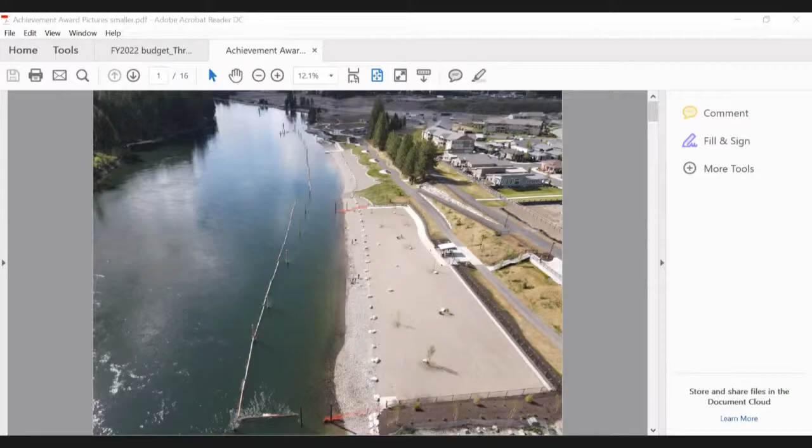I want to thank you for all the work that's going on. There'll be more information on this tonight. You were recognized in the state of Idaho. It's tough competition. The city actually received two awards this year, which doesn't happen very often, because there are 200 cities across this great state, and there's only about 15 awards given out. So it is a high-ranking award, and we couldn't be more pleased to receive it.

In appreciation, we'll let you have it for a while so you can display it on the wall, Mr. Burns, and shine it up for us, and then we'll share it back and forth. So all the work that you do is greatly appreciated. What a great public space we have, thanks to you, and you've been recognized by the state and our other sister cities. So that was my public comment to you.

So your Parks and Recreation Department put together the application. It was looked at by a group of individuals, and you're a winner. So I'll give it to Tony to put on his wall. Thank you, Troy. Thank you for that submittal. Maybe we could take a picture of it and put it on the website next to the Atlas District. Yeah, that's a good idea.

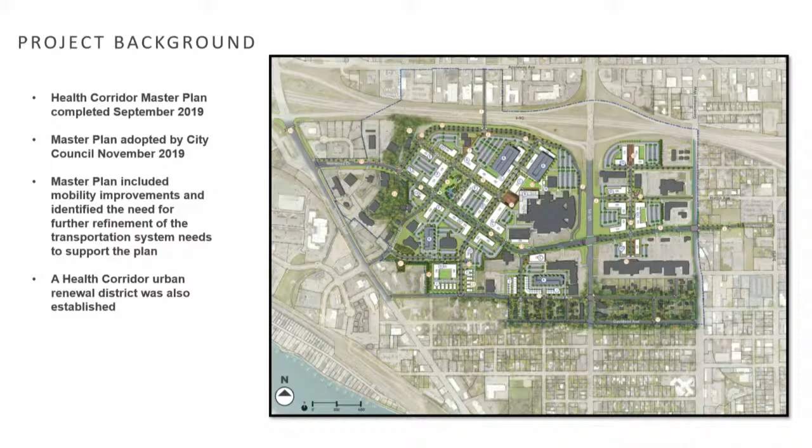So again, project background: the Health Corridor Master Plan was completed in September of 2019, and was adopted by Coeur d'Alene City Council in November 2019. It had some proposed mobility improvements in the plan, but it needed further refinement and traffic analysis, and that's what this project was intended to do.

So the goal of this project was to review the existing needs of the health corridor, as well as look at future transportation needs to accommodate the future development anticipated, both in the background as time goes on, but also by the master plan itself. And then develop an implementation plan for those future transportation needs once we had identified them.

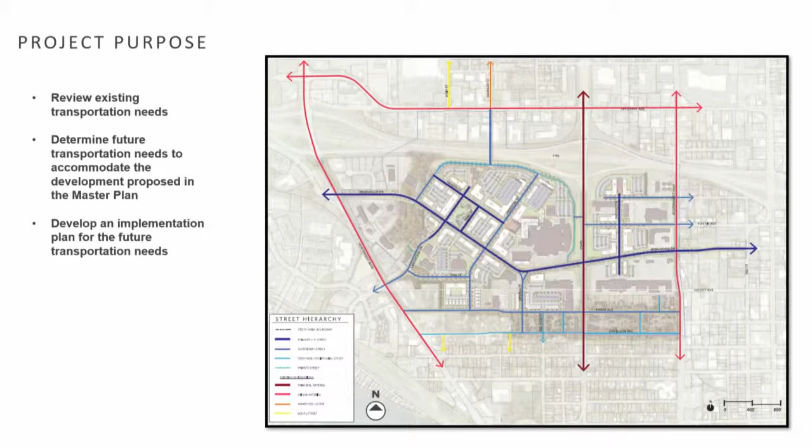That's the project study area.

As we talked about last time in June, COVID-19 really impacted the ability to collect new traffic counts. So we relied mostly on previous traffic counting efforts that have been done before, and then used some of the big data sources out there which track cell phone and mobile app type data, as well as Bluetooth data from the GPS in your cars, to fill in the gaps in the data picture that we had.

We then looked at short-term solutions based on the existing conditions. That included signal timing updates along Northwest Boulevard and US 95, and we also identified some need for access management along Appleway due to the collision rates being higher than the statewide average.

From the big data analysis, we were able to look at origins and destinations for the health corridor. As we mentioned last time, predominantly traffic is coming to and from the health corridor from the west, either through I-90 or Seltice Way, and it's coming from the north predominantly through Ramsey Road or US 95. The locations where those people are going within the health corridor or leaving from, as you can expect, it's the Kootenai Health Campus as well as the Interlake facility.

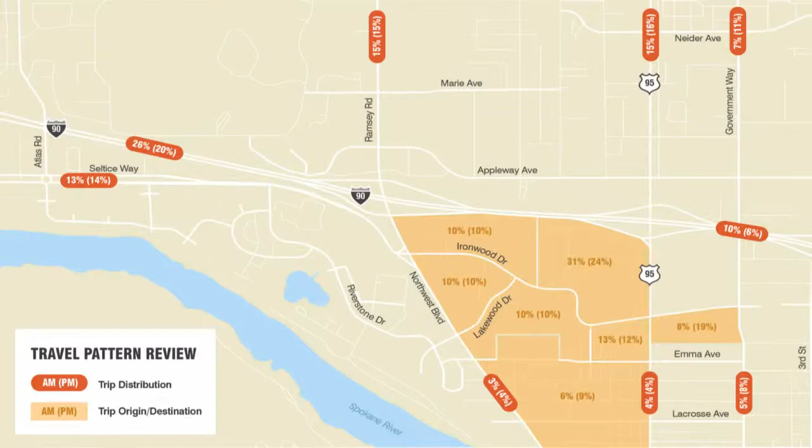So we went into our future conditions analysis, and some of the key takeaways from that analysis are that additional capacity improvements beyond those already in a lot of the master plans out there will be needed in the next 20 years to bring the health corridor to a passing grade.

The health corridor master plan improvements addressed the concerns in the immediate vicinity of the health corridor, but did not address the congestion created just by background growth along the major corridors.

Some of the major improvements we analyzed as part of scenario 1, 2, and 3, such as the Julia Street overpass and frontage roads from Northwest Boulevard to that Julia Street overpass, as well as an interchange upgrade at Northwest Boulevard, significantly reduced the congestion within the health corridor.

As a brief reminder, the no-build condition was the first one we looked at, and this is just the existing development pattern as documented in KMPO's future forecast.

We also incorporated some of the known projects being developed, including the I-90 third lane widening, currently under analysis by ITD, as well as the US 95 interchange upgrade, which is already in some of the future plans. In conjunction with upgrading that interchange, there will also be some widening necessary on US 95 from Neider to Ironwood. We also have the Atlas Mill development, and the Lacrosse connector with traffic signals currently under construction by the city of Coeur d'Alene.

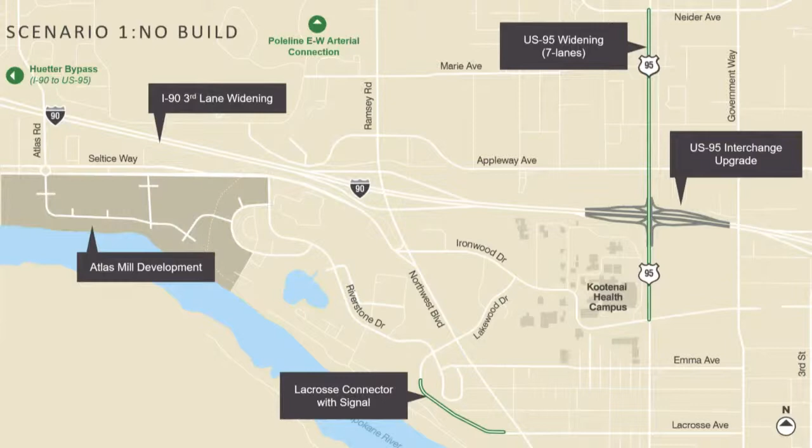That led to looking at the elements the master plan introduced, including a local access road north of Ironwood that helps parcels circulate without needing to go onto Ironwood Drive. It included a Howard Street overpass, a new signal at the Ironwood Drive and Lakewood Drive intersection, and a local access road on the southern blocks to help with circulation for those parcels as well, again to alleviate pressure on Ironwood Drive being the main conduit.

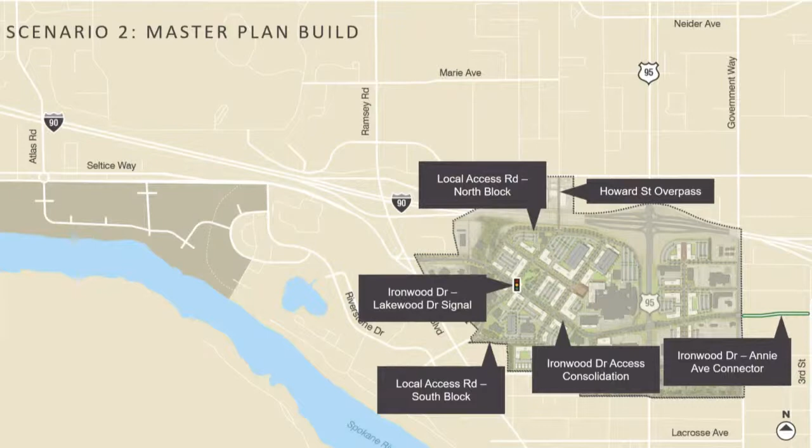It even includes a crossover from Julia to Howard to the north, so that people can have a new north-south connection from the Riverstone development all the way north, eventually leading to Kathleen.

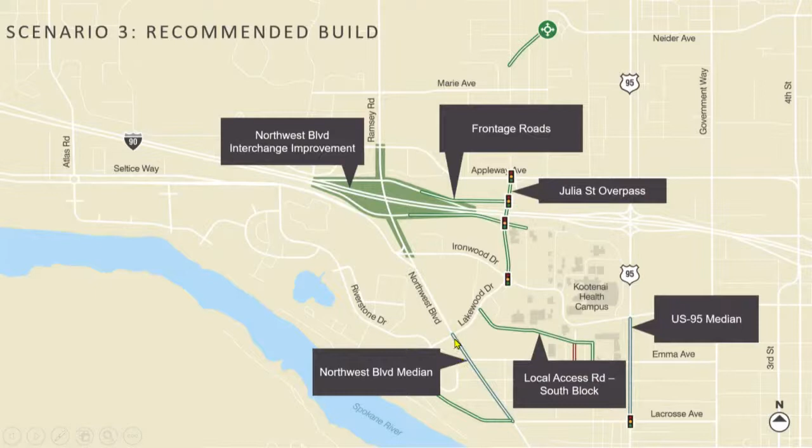We also looked at congestion in all three scenarios, and we consistently saw overall congestion, or people waiting in line to be served by the signal, reduced at all the signals within the corridor.

So the next task, and what's new in this presentation, is going over the implementation plan. Our goal was to take the projects we looked at in the future conditions analysis and phase those into a plan. These phases line up with what was approved in the Health Corridor Master Plan, so we're all talking in the same context of years and timeframe.

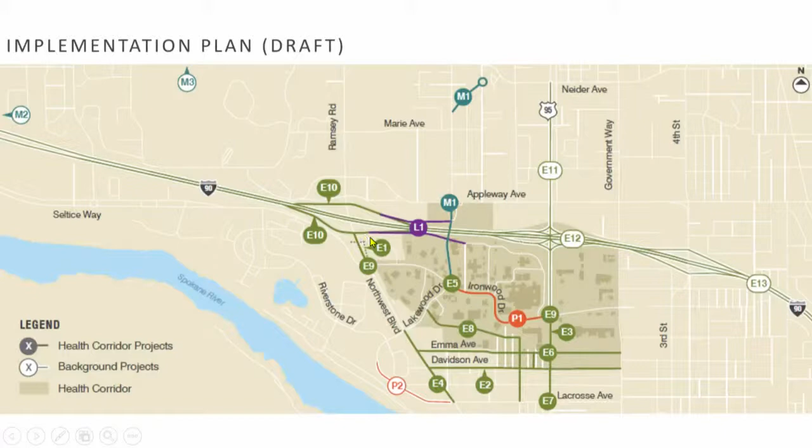The preliminary projects are in orange. We have the Ironwood Drive access consolidation taking place as soon as parcels start to redevelop, and project number 2, the La Crosse connector, that's going in right now. Then we have a lot of projects in the early phase, between 3 to 7 years out. A couple additional projects are in the midterm: the Hutter Corridor to the west, the pole line connector to the north, and the Julia Street overpass with extensions. Then we have the frontage roads in the late phase, beyond the 15-year horizon.

When we break those out and look at the cost estimates, the Ironwood Drive access consolidation we're assuming happens in conjunction with redevelopment, making sure developers are aware that those costs carry forward. Then we have the Northwest Boulevard interchange capacity improvements, mostly widening of the existing ramps, hence the $8.9 million cost. The US 95 widening and Ironwood Drive capacity improvements we're assuming happen in tandem with the US 95 interchange upgrade, which when we priced out the current plans is about $86.6 million. The Julia Street overpass comes in at about $16.9 million, with the frontage roads in the late phase at about $6 million.

I know that's a lot of dollar numbers thrown at you. Do you guys have any questions about the phasing or comments on the implementation plan?

What's the funding on the 95 upgrade, there's 86 million? How much of that is state, or do we know yet? So we're not identifying the source of the funding right now. We're identifying, you know, we've got to look at that as part of this.

Okay, thank you. Dan, did you have something? No. Anybody else? Any questions for Dowell? Not for me. Well, thank you for the update. Yeah, absolutely. Thanks.

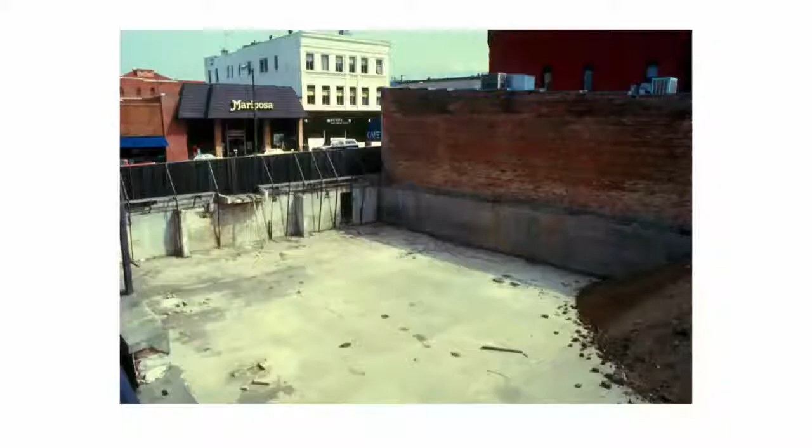And Brad, the Sherman project came next, and the Lakeside, and on and on. We did fill the hole up. The National Guard took some excess soil from the fairgrounds, and we had a parade of trucks bringing this forward.

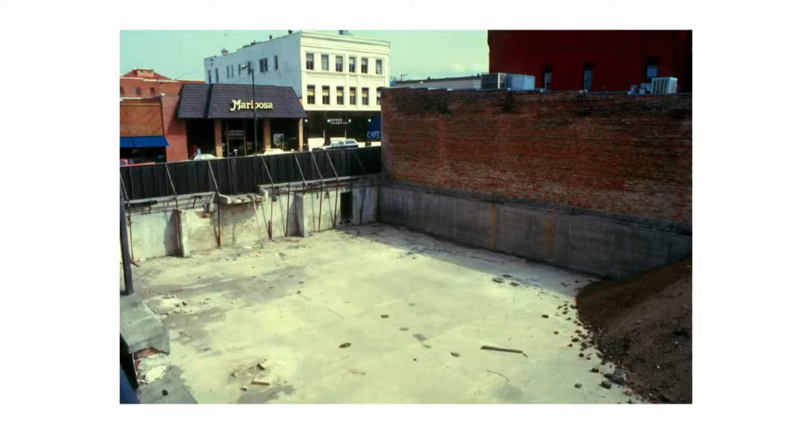So after 30 years or so of use, fortunately the club has stepped forward and partnered with you guys on the acquisition and to take the next step. We've been working with the group for almost 2 months to develop a design.

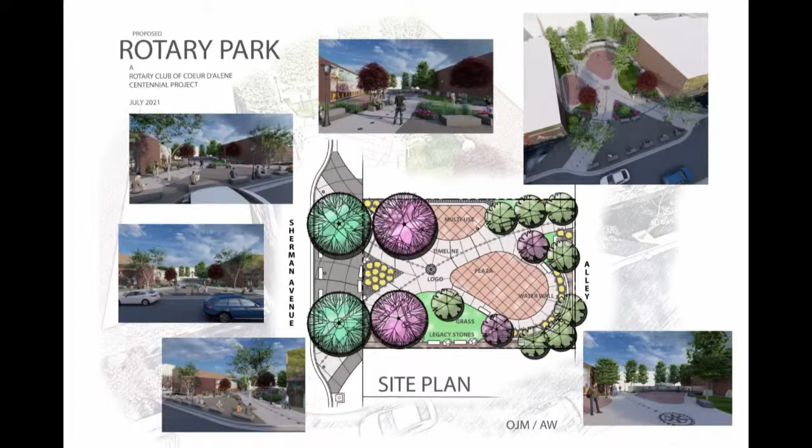We're here to hear and talk about today. It didn't just fall out of the sky. We did spend some time initially in visual preference, asking them questions about pieces and parts, what they might

like to see as part of their contribution to this park, how we might approach a water feature, what that would look like, what kind of volume, what scale, places to sit, pavement treatments, lighting, and other special treatments. We've had a lot of fun talking about that.

We did have a brief process where we talked about opportunities and constraints, drew some conclusions, and presented 3 different design expressions to discuss, trying to bring all those use areas and some new considerations for use forward in the designs.

We landed on concept 3, which we further refined to create this multi-use pocket park plaza to take forward for development. The design features an extension pushing out into the street, where we're proposing eliminating 2 to 3 parking spaces.

One of the things that came out of our discussions early on was we wanted to bring people up to and through the park, not just up to and into the park. By projecting out to the street, we wanted to create a stronger presence and more seating, more pedestrian space, and more multi-use space.

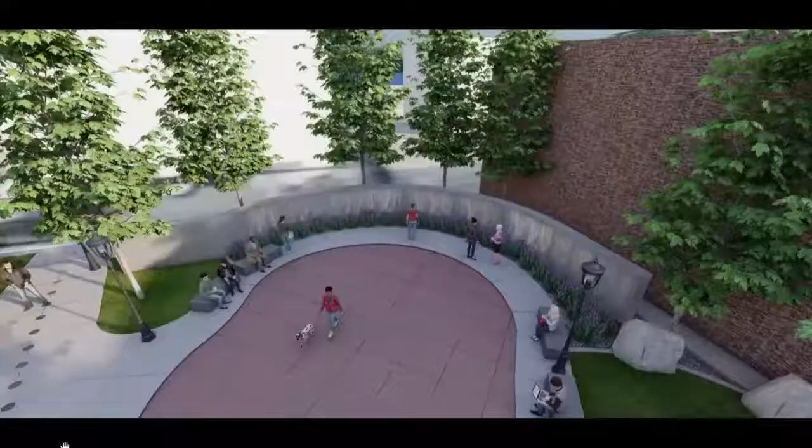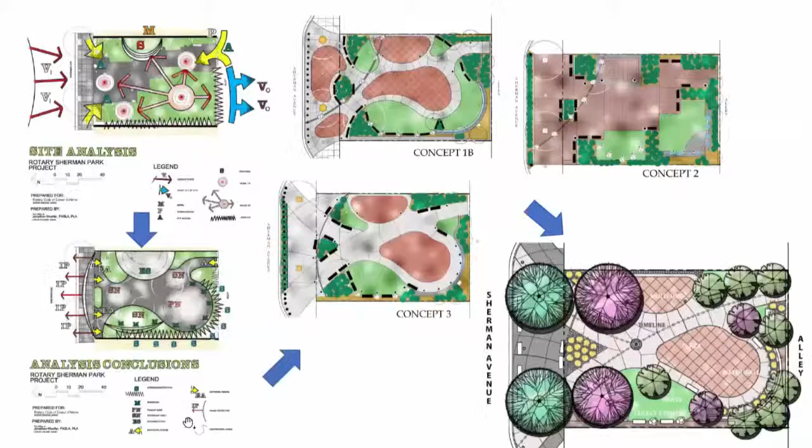The height of the wall was set up to block foreground and middle ground views back to the alley and the parking lot behind. But because the wall is 6 feet tall, we'll still see the lake behind it and the mountains beyond, and there was a lot of discussion about the importance of that.

Strangely enough, as we finished up, we also heard that there's perhaps a project that may build a larger building there that'll block that view anyway. So nonetheless, we want to ring the back of the project with trees and create the opportunity to expand activities and use—formal scheduled use, but also informal activities as well.

One of the neat things about the project is there'll be some subtle embedded features from the club and the history of the club. The very first project the club did was 100 years ago when they came in and developed the fields at Memorial Field—not the grandstands, but the fields. That was their very first project in the 1921-22 era. And since that time, the club has done a lot for this community.

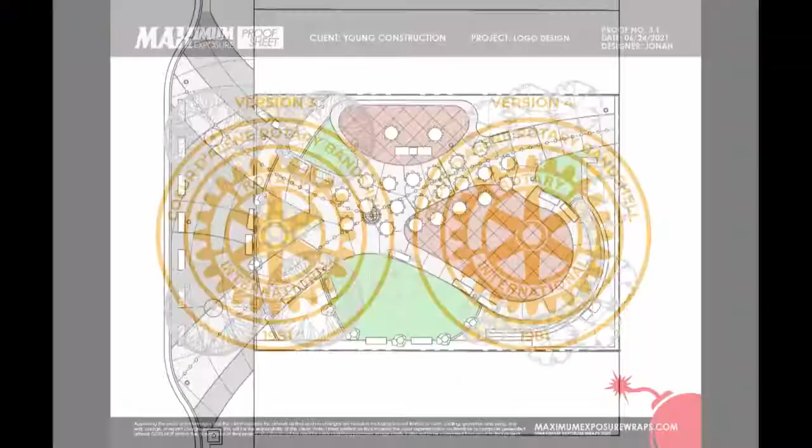So they're busy researching all the projects they have done, and they want to have these bronze medallions cast. Looking at our design, we have this center line of intersecting walks, and we intend to core those and place those medallions sequentially down through time to identify each of those projects. In that way, they'll commemorate the work they've done and their commitment to the community.

I prepared this exhibit for them to look at and talk about if they wanted to expand use. With the hard surface and other infrastructure improvements to the site, you could actually schedule your own club meetings, set up tables, and have an event there if you wanted to. That's the fun part of this—seeing the new and expanded uses that will come about as a result.

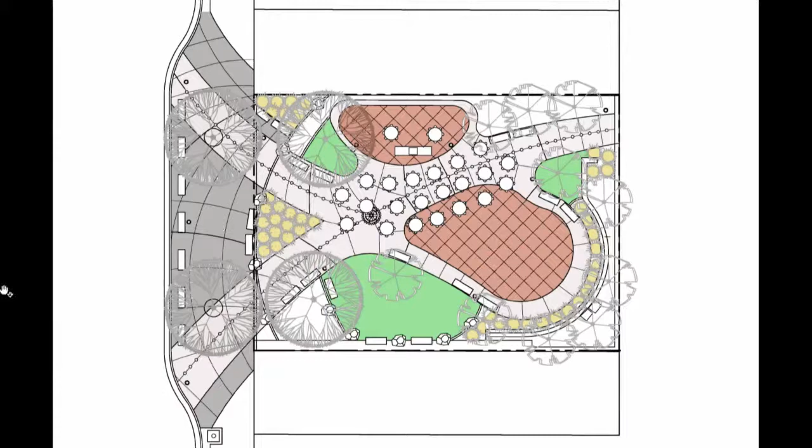The surfacing is concrete, or colored concrete, or textured, colored, and cut concrete—just to create interest and use, and kind of amp up the fit and finish, if you will.

So what follows are a series of images just to show you what the park looks like. If you were standing across the street, maybe on one of the upper floors of that Wicket building on the corner, or on the sidewalk across the street, you can see the impact here of how we push this out into the street and make use of those parking spaces to expand seating opportunities, allowing people to walk up and find themselves in the park.

As you walk up the sidewalk from the west, looking in, you can see these arc lines and cut score joints, and also the placement of the medallions.

This gives you an idea of how the space will change, but also the opportunities for special events. We think they can continue the summer concert series as it is now, but also have a little more sound and more secure seating, perhaps if you wanted to bring a chair or something else.

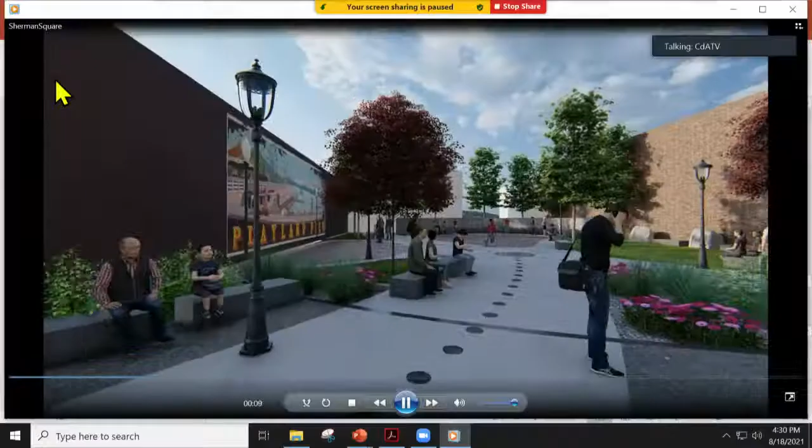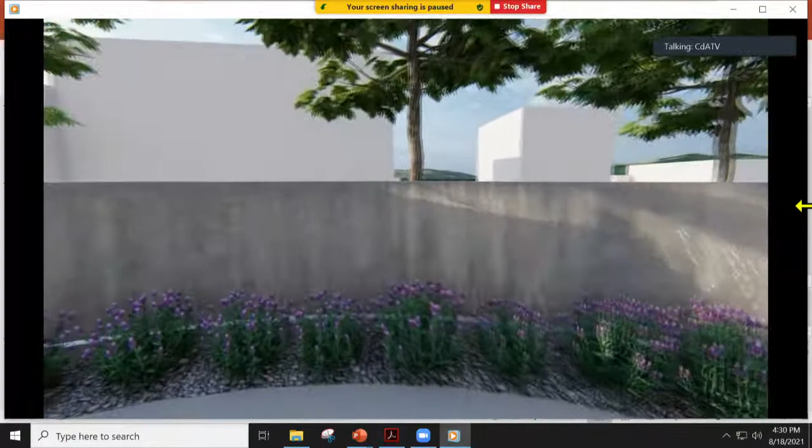Jenny also prepared this animation for us to look at, so you get a real-time walkthrough of the park. This will give you a chance to actually walk the sidewalks or the plaza and see it at real-time scale, how the spaces will work and what the park will look like. Get an idea of the views out behind before we see a new project there.

The benches are intended to be both bench and, out towards the street, traffic control or access control—to prevent that age-old North Idaho off-roading proclivity that sometimes people have. They can be picked up and moved around if we have to adjust, but we're trying to anticipate certain things.

The existing street trees and the existing flowering plums down there will be saved, and we will add new trees as shown. So that's the overall look at the project, what we're proposing. We've prepared a cost estimate and given it to John, so if you have questions about it or want to talk more, we certainly can.

Any questions? Well, I like that concept of the wings kind of coming out of the walkways and things, and then I see where it kind of goes over in front of the adjoining properties—is all of that space city property, or are there other decision makers you'd have to negotiate with, neighbors, to be able to access that?

Well, everything we're doing is in the public right-of-way. We're just replacing some existing walks and drawing that park and plaza down the street a little bit. I'm sure there's further discussion we can have if there's concern. We're at this time working through the process with the Park and Recreation Commission and hope to get back to see you folks at the council for some final stamp of approval. But that is the intent, yes.

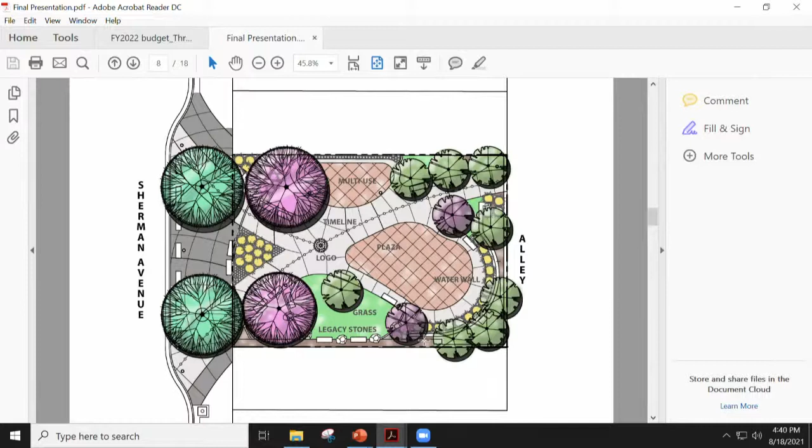So going along with that, it looks like maybe 3 parking spots. Losing those is probably not that big of a thing, and I'm not worried legally about the city setting a precedent by doing that. But I don't want this to start encouraging other people where someone has a building or a project in different areas of downtown, and they'd like to start doing this, to where we start having several of these things happen downtown.

I think we have to look at this—and you're on the council, you can tell me what you think—but I think we have to look at this as a special legacy project. This isn't the kind of thing where people should be encouraged to start trying to do designs where they go across the sidewalk and take the parking out, because if you start doing a lot of this, it'll be detrimental to the downtown. It probably won't be a big thing with these parking spots, but you don't want this to start to be a habit downtown.

Well, I would just say, since you asked, that on one hand, yes, I think you have to be cautious about that, but like so many other items, I would find there would be a whole lot of folks who would say, oh, that's wonderful, that's the first step towards making Sherman Avenue really pedestrian. So there are folks all over the map on what they'd like to see.

But again, I think this is very targeted, and we'll see. I think there's good justification that really ties it in, but I don't think it'll go unnoticed, so it'll be a decision point along the way.

Right. Yeah, and I've heard some people talking about how nice a pedestrian mall would be downtown, and it looks great when you're at the street fair or art walk or something—it's like, wow, this would be neat to do. But I know when we did our projects in the late 80s, the designers were saying, man, I know you're kind of depressed with the state of your downtown and you're wanting to revitalize it.

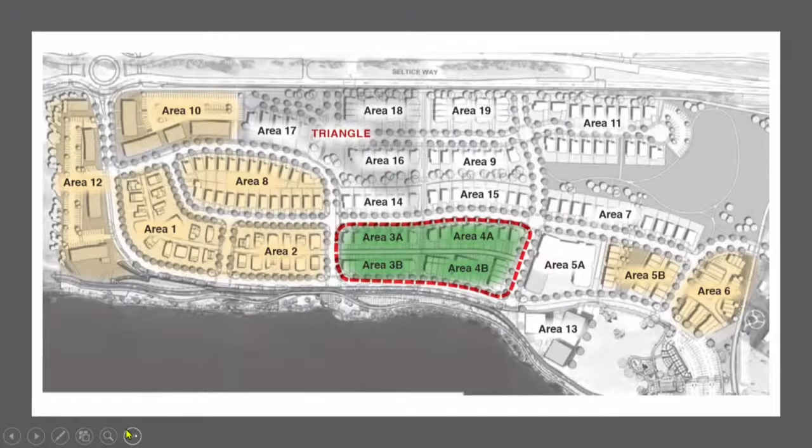In short, there was some strong proposals with some competitive pricing, so it was a good round of RFPs. I think the steering committee did a great job. I reviewed this closely, it looks like you really did your homework. Thank you for that.

I think it's significant to get a national level company like Toll Brothers coming in here and developing. I think they've been in Boise and Seattle for a while, so it's significant that they're coming into our project. Yeah, we think it will kind of create some diversity in the project too.

So we would look for a motion from the board if the board accepts that recommendation from the committee. I'll make a motion that we accept the recommendation of the RFP Review Committee for the Atlas Areas 3 and 4. I'll second that. Any other discussion? All in favor? Aye. Any opposed? Motion carries.

So now Executive Director's Report, Atlas Project Update. We just have one item left under the report, and that is to invite our friend Mr. Phil Boyd to give us an update on the Atlas project. Thank you, Tony. Good afternoon, board.

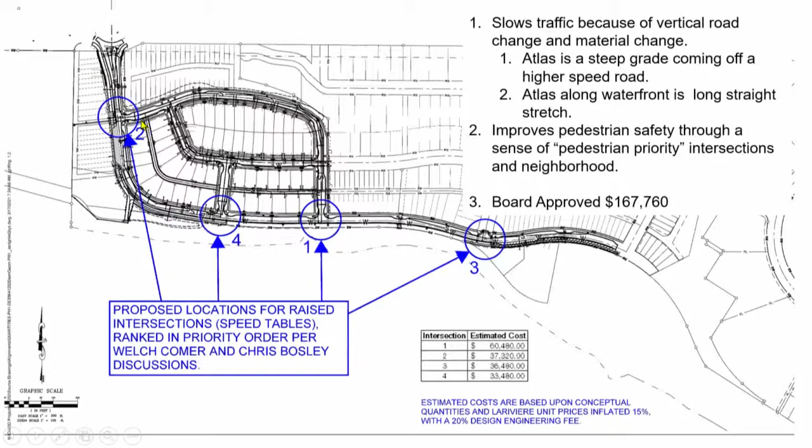The shared use path, just to refresh the board's memory, it used to run along Atlas Road, but by taking the opportunity to relocate it on the west side of Area 12 and the portion on the east side of River's Edge property, we were able to create some additional parking here and make a dedicated shared use path so it doesn't cross the driveways here.

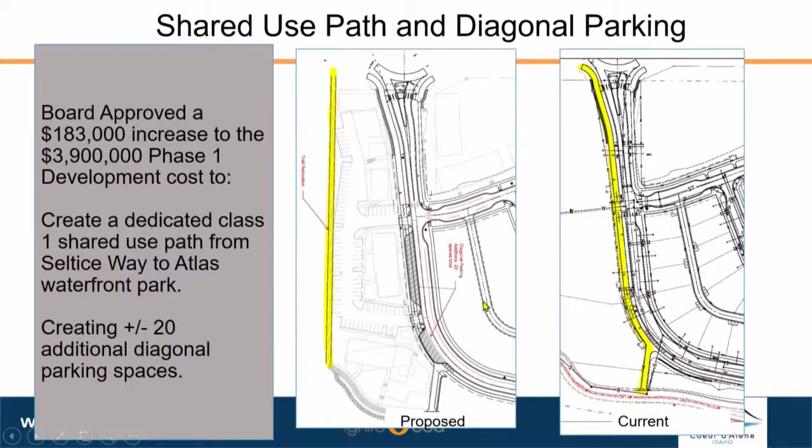And so the board agreed to fund that. We've been working with the city, and Mike Gridley's been great about taking point on this and working with River's Edge, Lance Douglas, to kind of nurse that along. And now that we've got an agreement in principle, we'll actually start on the design. We hadn't started on the design because we didn't want to spend that money until we had a full agreement there. So we're moving forward on that.

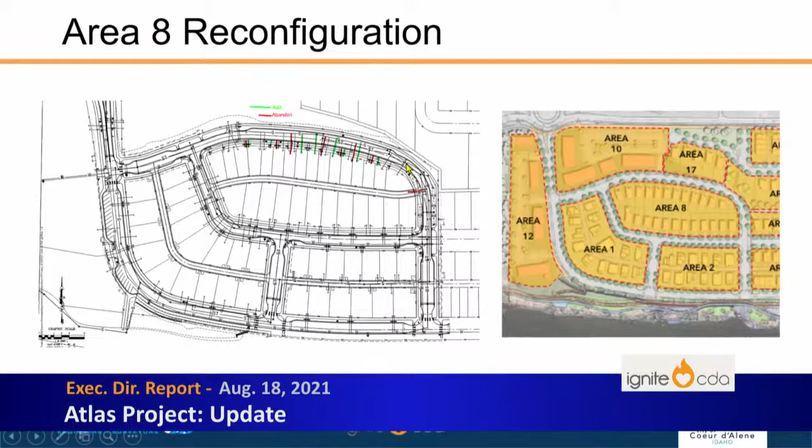And then the Area 8 reconfiguration, just to refresh the board's memory, this is what Area 8 looked like when it was put out in the RFP. Riverfest, which is John and Ann Butler, came in and said, can we do single family here and townhomes on the upper part and put an alley through there, which was one of the configurations in the development standards. The board had decided to put the RFP out under that configuration, so it was platted that way. The water and sewer services were installed that way.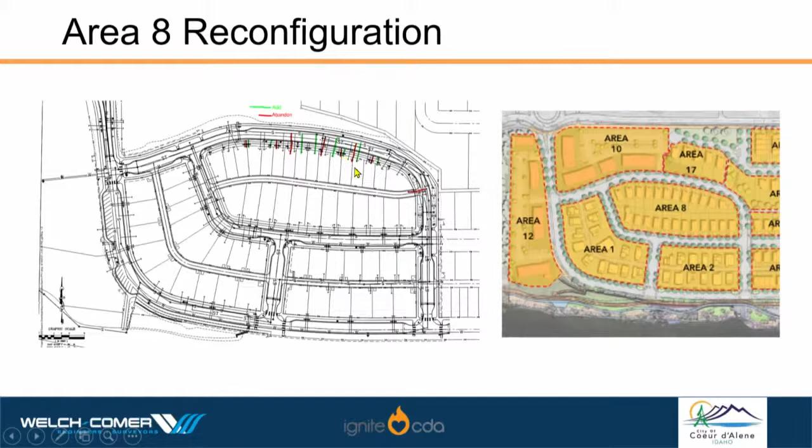And so the Butlers are funding construction of the alley and relocation of those services that you see right there. So they're actually funding that, so it's not going to have a cost impact to the agency. So that's moving along. And the phases have changed and continue to morph a little bit, to achieve economies of scale on certain things. And so right now we're working on phase 2A and phase 2B.

The proposed contract amendment that you're going to see come forward in September will build all the infrastructure that you see down here, but do all the earthwork in 2A and 2B, just because it makes more sense to do that. So it will be a pretty large number.

We're still working on fine tuning, negotiating some of the terms with La Riviere, the unit prices on that work, and the schedule. The reason we're pushing hard to get the infrastructure down here is because Area 5 and the two you just talked about, 3 and 4, we were waiting for this RFP to open so we could figure out exactly how those lots should be platted, so we just plat them once and don't have to replat them.

As I mentioned earlier, Area 8 here, because the Butlers wanted to reconfigure that, we had to replat that property. Again, they funded that replat.

Bless you. Thank you. Sorry.

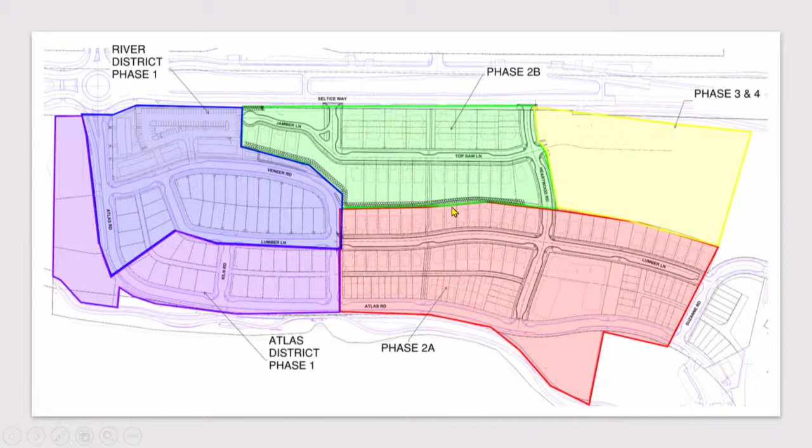That's okay. So I just wanted to let the board know, it doesn't really impact things from your standpoint, but sometimes we're moving the phases around a little bit for our purposes to make sure we're achieving economy of scale.

I wanted to give the board a refresher on where we're at cost-wise. When we originally did the financial feasibility model, we estimated the infrastructure improvements at $16 million. We updated the model in March of 2021 when the triangle parcel was in play and the council was trying to decide what to do with that. At that time we re-estimated the improvements and we were at $14.5 million. So even with the current escalation in construction costs, we came down a little bit, and some of that is just because we know more than we did then.

There's still some uncertainty in Mount Hink. We're not touching Mount Hink in a substantial way as part of this project, but we are remediating Pit 1 and Pit 2 in these estimates. Phase 1 is contracted, and I'm anticipating we might end up about $5 million on Phase 1. So that's kind of over budget, but that's because we shoved some of Phase 2 into Phase 1, which goes back to my earlier point that we're shifting some of it around.

We anticipate our objective, and Tony's objective to me, is we have to stay within that $14.5 million budget as we move forward. If that starts to change, we would be back to the board with an explanation saying, gosh, asphalt went off the charts and everything's going crazy. But we anticipate we should be within those budgets, certainly in Phase 1 and Phase 2. So I just wanted to give the board that reference point.